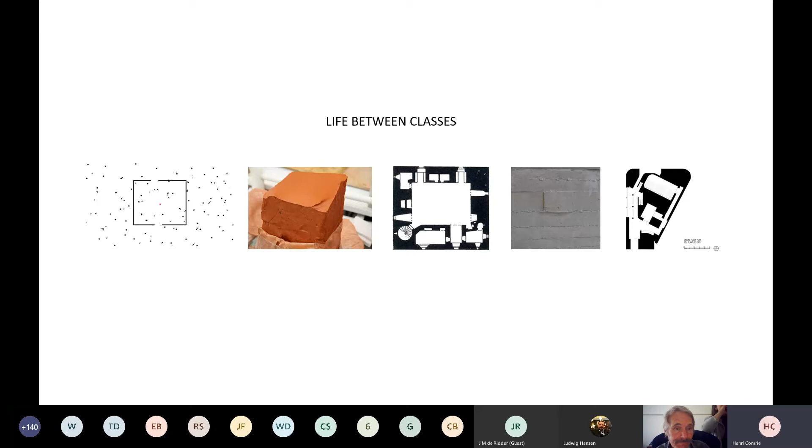Ludwig mentioned our practice being Cape Town based. For a very long time we've practiced around this environment, Long Street, one of those beautiful streets—if you move up and down it there are all these buildings. Ultimately, if you asked me to talk about any specific building, I probably wouldn't be able to. One always thinks of it as a whole, and I strongly believe that if you build better streets, you build better cities. If that's the priority, you get all the other benefits that come with building cities.

So the talk is very much related to architecture in context, and how our practice's architectural work has been influenced by an urban design focus and urban design awareness.

This is a series of drawings from the first stage entry for the Kimberley competition, for which Ludwig Hansen's practice did the framework. The images show something unlikely—building something very dense and compact in a very low density environment, in the Northern Cape, which is the least densely populated of all our nine provinces.

So the opportunity is really remarkable, starting from scratch in a place like Kimberley, thinking about the future and the opportunity to build a campus—how would you do it with sustainability principles in mind, with density being one of the key aspects?

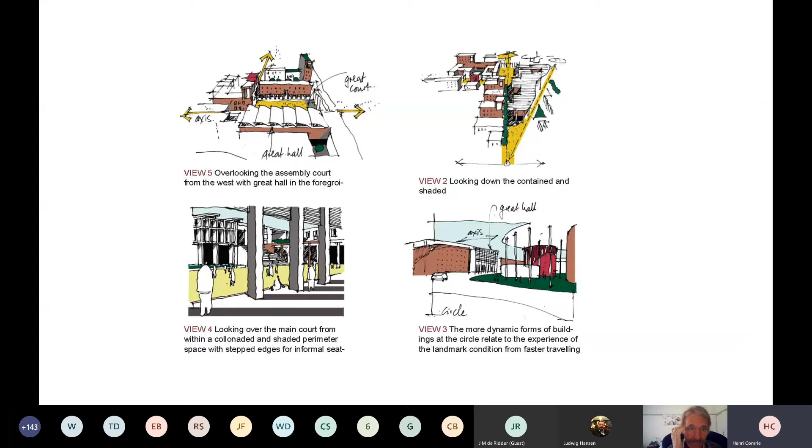If one imagines how almost all campuses in South Africa have been built in the past, they've been detached, removed, typically campuses rather than city universities.

This drawing is from the second stage of the competition. It shows how the framework presented to participants forced everybody to think about buildings in context. Without even knowing which buildings we would eventually do, we had to present a proposal demonstrating an attitude towards building in cities, or rather in Kimberley in this case.

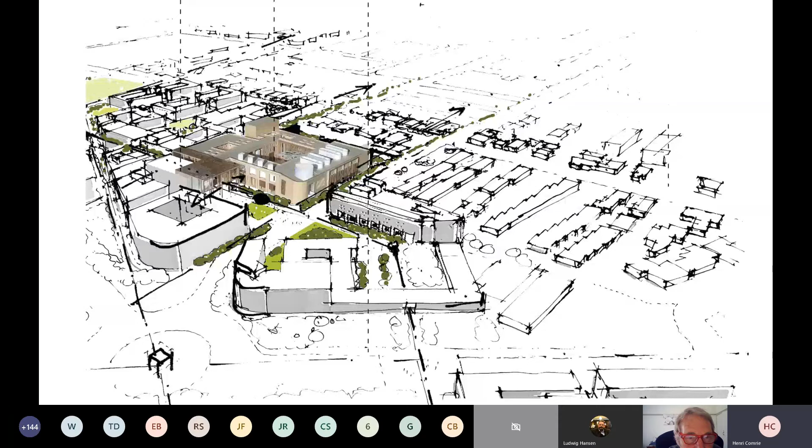So the model you see is not the building we eventually built. We built other buildings, but I'll get back to that.

Also in stage one, there was the opportunity to do research—to think about the Northern Cape, its climate, the vernacular, and absorb all these things differently than one usually would, where often from stage one you're under pressure to produce quantities, areas, parking ratios, policy conformance, approvals processes, and so on.

So the competition in that sense was fantastic, giving us space to think about this before we even knew we had the job. If one could apply that culture to all projects, that would obviously be fantastic, but we don't always have that benefit.

Some more drawings from, I think, the second stage competition entry. I'm talking about first stage and second stage—the first stage was an open stage where every architect registered in South Africa could participate, and the format was 10 A4 sheets, which is manageable. I literally did that on my kitchen table.

When we got to the second stage, it was down to 6 A1 sheets, if I remember correctly, which gave us opportunity to think more about the problem, but in the context of a specific building for which we were given a footprint.

After the results were known, we were dispersed onto different sites, meaning we didn't even build the building we designed in the second round—a very innovative way of running competitions, forcing people to think beyond their own buildings, to think about context and responsiveness.

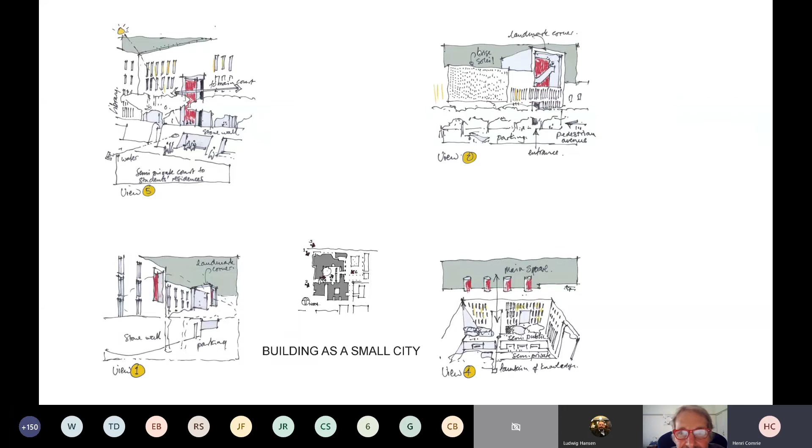With all universities, all campuses, the narrow definition of building a campus is to provide teaching facilities. We know at the moment all of you are sitting at home in different spaces, not even at university. The talk I'm giving really talks to that too.

What is there beyond the formal teaching facilities, which is always going to be the focus, the anchor? In the shopping mall, you'll have the Pick n Pay being the anchor. Here you have these classrooms, but they're also sources of energy and movement, and they're anchors in space. So they're much more, their potential is much more than their physical extent.

But I'm going to be zooming out. And so we'll be getting back to these, but I'm going to zoom out for a bit. This is really the challenge.

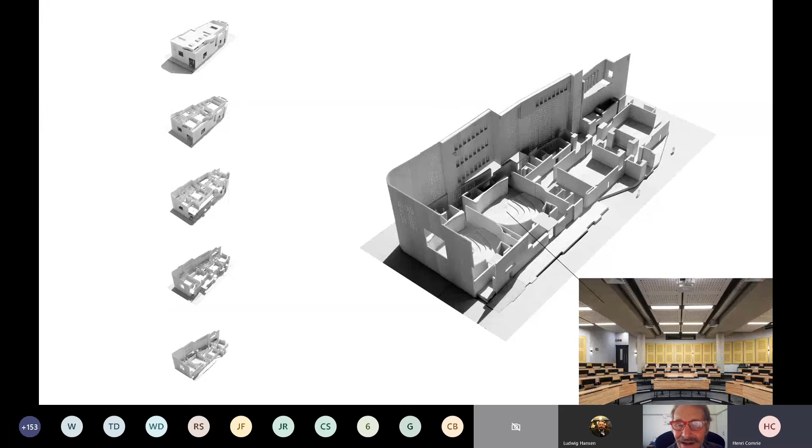But you can see how that massing has now been carved away and how we've stacked it. And this is a physical model. It's not a BIM or a computer model or whatever, because in a way, a building like this, which hasn't got a grid per se, it isn't there, but it doesn't start off with a grid.

Those sort of repetitive mechanisms don't work that well. And we take a lot of joy in doing bigger buildings where that doesn't become a fix, where BIM doesn't become the master. It's just a tool.

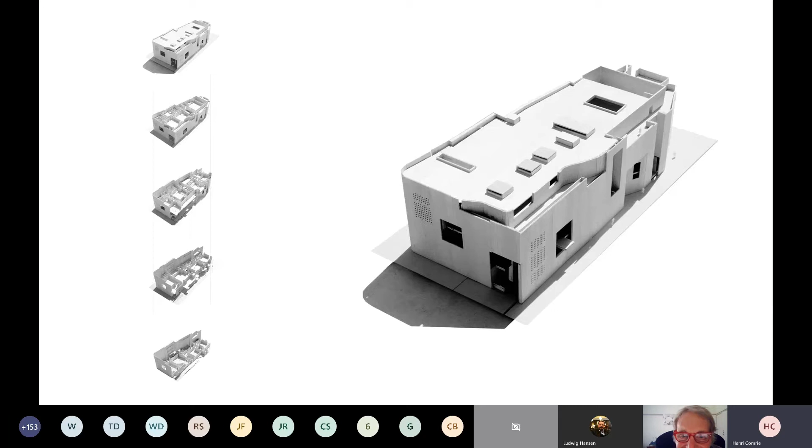So if you look at the stacking going up and then eventually get to the envelope, it's the way that we work. And we can't actually do without the physical model, because we constantly refer to it.

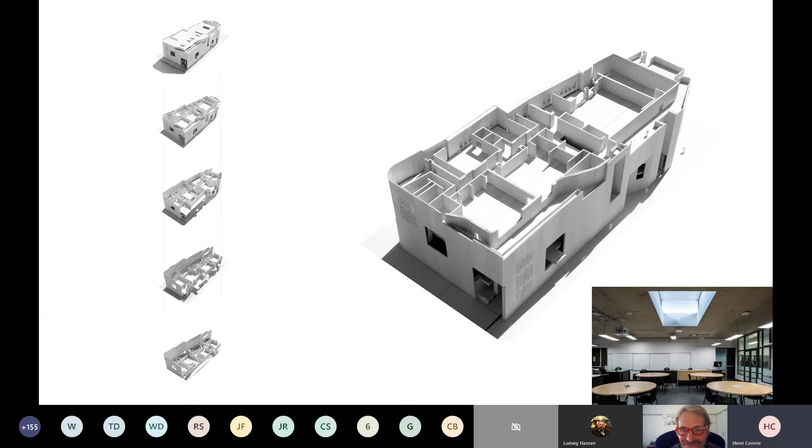It also is what Venturi would call the difficult whole. It's a complex arrangement, but when it's done, it almost should seem as if it was effortless. I think that is always the big challenge with architecture. Good architecture seems effortless, but we know behind that there's a lot of effort.

This is a different project we're working on, in the city area of Cape Town. It just shows again, in our own practice, from an urban design perspective, when we do housing or anything of that nature, density is the driver.

And then again, one can imagine this being a mass, like that clay block, and then you start carving away, and then you arrive at the buildings. You don't work the other way around. And as I said earlier, we enjoy working like that.

This is another framework that we're busy with. And in time, your view, or our view, of architecture and urban design becomes inseparable. I think that's one of the great things of getting involved in urban design.

There are all these terms, urbanism, placemaking, and so on. Ultimately, formal urban design, studying urban design, getting used to the principles, it becomes a staple. For us it's become a real joy, because a lot of those other things aren't closely related enough to architecture and building, they're just events.

Then one looks at this drawing, and I've consciously faded out, created a watermark of built form at the back. Ultimately it's about this. It's about maximizing choice for the greatest amount of users. It's a loaded term, but really it means standing back from the building and not talking about my building or even our buildings. It's a collective, because on a campus, of all environments, this is a profound opportunity.

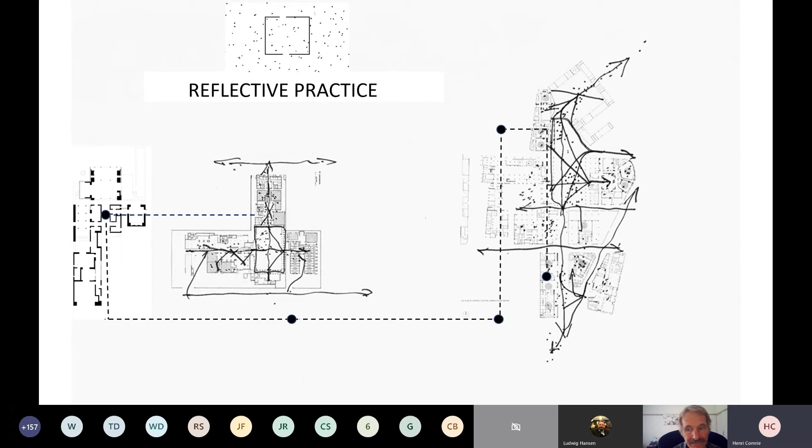We've moved along. If one looks at the plan of Rome, this fantastic drawing of 1748 by the Nolli map of Rome, it's a fantastic drawing. Initially I was intimidated, I remember as an architecture student, intimidated by this very busy, large drawing of Rome.

I've only really been to Rome recently - it's circumstantial. I've been to many other places, but Rome is one of those places where there's this fantastic balance between object and space, where one can enter objects like the Pantheon, but generally one's experience is this magic maze of spaces which is not dominated by the car.

If one looks at this drawing - let me get my laser pointer, which remarkably I found - the spaces that flow into buildings is really what interests me as an architect, meaning that one doesn't only have public and private. You've got these two magic layers, semi-public and semi-private, which is really what Rome is about.

And I think that's the sad reality of our cities, that things are gated, they're closed off, you drive into basements of office buildings. And even if people call these buildings mixed-use, they're not really mixed-use unless you've got horizontal and vertical mixed use.

Again, on campus you've got that opportunity. Pockets are these spaces off the avenues, the movement axes, the way people move - these delightful spaces, these pockets that sit off it, that you discover in time. The first time you go to a city like Rome, you won't even notice some of them. In time, you find them.

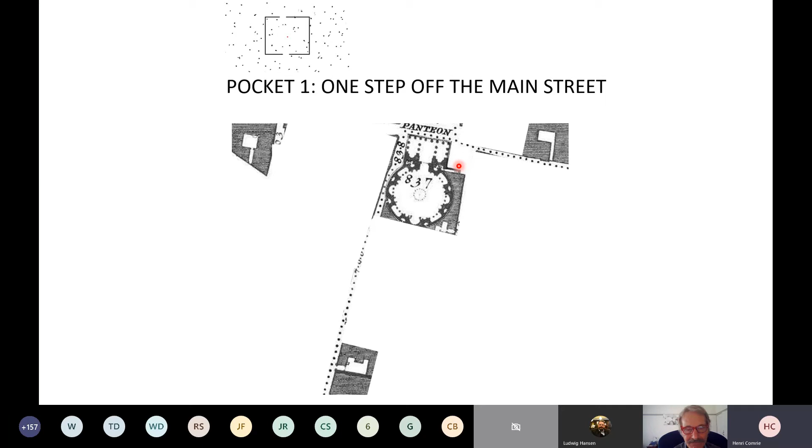Those are the sorts of spaces that are lacking - the positive spaces that are one step off the high street. If one looks at a design like this, it's those sorts of spaces, and those are really the memorable spaces. That's got nothing to do with the building itself - it's actually got to do with the good neighborliness of buildings, how buildings relate to those spaces.

Then there's the second pocket, which is at a finer grain scale, at the scale of the building. As I said earlier, one starts talking about buildings as if they are cities. This remarkable picture on the left bottom was taken by Gabriel Fagan, who recently passed away, from his airplane. I've been reading a lot, reflecting on Gabriel's life recently, and his fantastic work over a very long period of time.

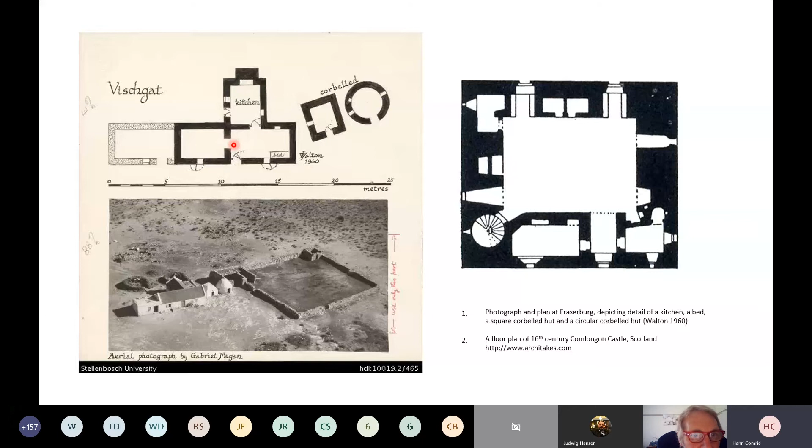I think in our climate we've got the opportunity to thicken walls, yet we've got these flimsy buildings - I call them SketchUp buildings all over now. Everything just gets stuck onto very light frames, rather than indulging the opportunity of carving away. As you can see on the left here, this is also part of the vernacular of the Northern Cape, and we'll get back to that.

This is just a bit of a detour into a pocket in a house. There's a door to a house, and the door is closed, but there's an anticipation and expectation of something that follows. Then the door opens, and there's another layer, and one sees into it, and you get certain glimpses of what lies beyond.

Light at the end - it's also a way one would look at a city moving down a street, and there's a square at the end, and you start getting that sort of sense of excitement. You want to get to that square, but as the next door opens, light catches your eye, and you can see a different order.

Initially you were just aware of the main order running down the house, the central axis. You become aware of another order, the lateral order, and those are often the more interesting spaces for me. The talk really is about the importance of not the full frontal stuff, not the main elements, but the serendipity - those sorts of opportunities for discovery.

And then if you look a bit further, you see a step on the right-hand side, the sort of anticipation created by that step. Then you turn right, you look into that space, and there's the stair, and light starts playing a role. You can see the rail leading you to the next space, and then the next space.

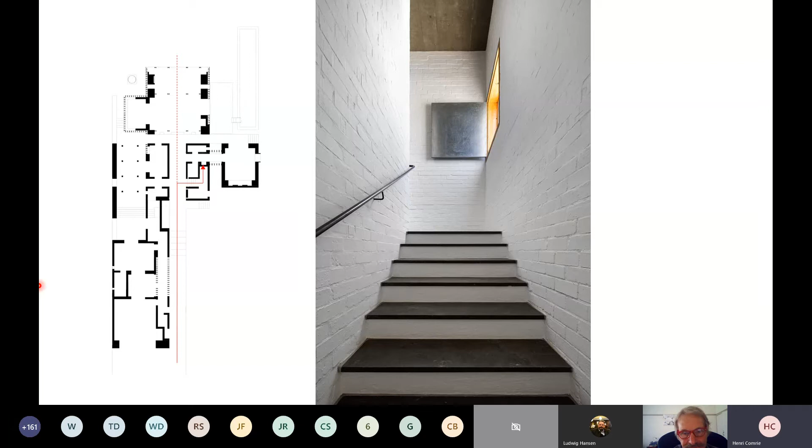I always say with thesis students, when selecting sites and projects, students tend to want to do something spectacular. If you listen to podcasts of David Chipperfield, I really love listening to him, he says we shouldn't be blown away by architecture, we should be fond of architecture. That's the spirit in which we try to do architecture. It's not about blowing anybody away, but creating a timeless experience that will be there forever.

Okay, if one looks at a house, this is a different house that we did, not the previous one, and this one is fairly well published in the Cape Winelands. But if you look on the inside of a house like that, this is really what we're pursuing, it's those pockets, the delight of the use of light, and the principles that Louis Kahn spoke about, that once you take the light away, these spaces aren't the same as they would otherwise be. There's the fantastic opportunity to use light as something dynamic, patterns that move, morning experience being different to evening or late afternoon experience, but also the opportunity to frame views out. So you're sitting on the inside looking out, not on the outside looking in and admiring the architect's work as an object. And as I said earlier, that's very much an urban designer's way of looking at things.

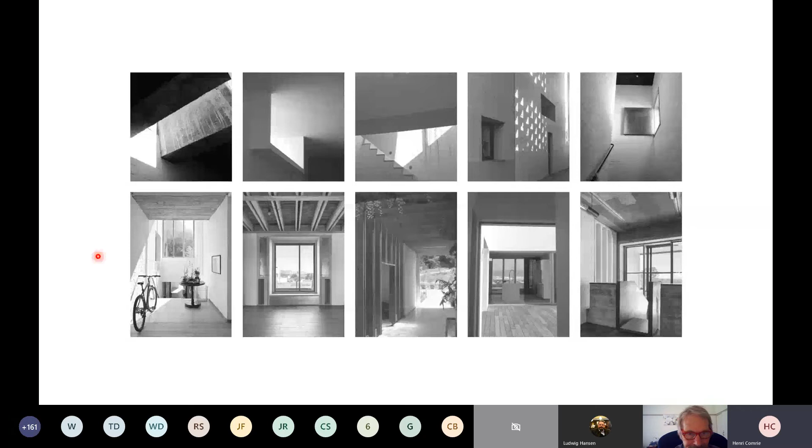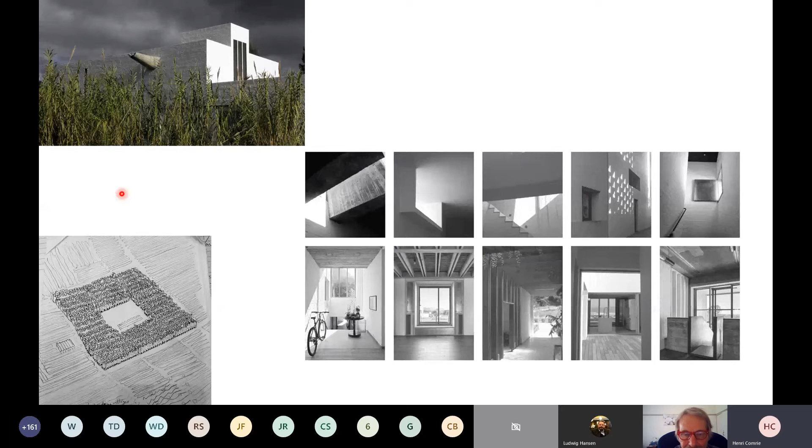It takes a long time to develop this sort of work and to feel comfortable with it, because you always have to find ways of convincing your client, because it's very difficult. How would I sell this typically to a client? They say, are you crazy? You're going to sell me a big white box? Because that's all I can see on the drawing. In your mind, you've got spaces like this. And it takes time to do what Adolf Loos calls the Raumplan, or the space plan design. Carving and sculpting space takes a lot of time and effort.

Then comes refinement and essence. I spoke about Gabriel Fagan a bit earlier. If one looks at these two houses, the architects were the same age. On the right-hand side you've got Gabriel Fagan, 1951, at 25 years old, a house for his parents. On the left there's a house by Richard Rogers, who's recently retired from his practice, I think he's 87. Gabriel passed away at 95, this house is from 1970.

And if you look at these drawings or pictures of these houses today, they're absolutely timeless. Those are examples, or inspirations, of architects that for their entire careers pursued their passion and a very specific way of looking at things. We're living in an era of Instagram, of social media, of information overload, where it's very easy to become confused. So I've got great admiration for architects that have been practicing. In Gabriel's case this is 70 years ago, and this house is still a good house, it still does all the things it does.

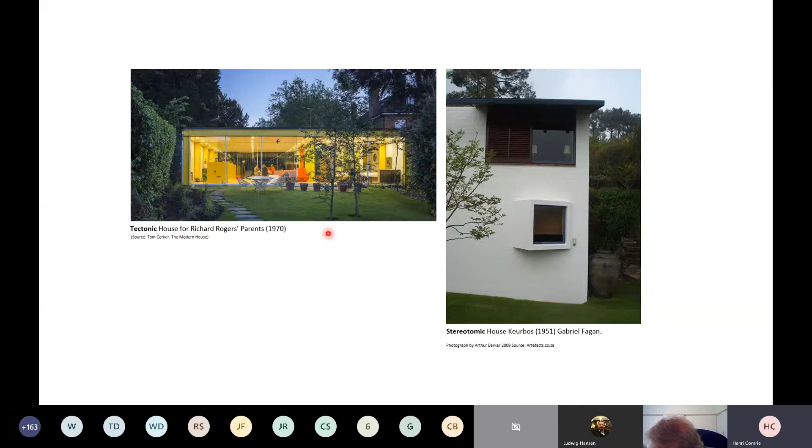If you look at Rogers, he's taken that through scales to the Pompidou Center, but it's still Rogers, and you can still recognize that. And then also the love for detail, because if you're always busy changing form externally, meaning it's a circle or a star or whatever you want to call it, the coolness on the outside, you actually rob yourself of the benefit of getting to a level of refinement. It's just beautiful, simple details, not look-at-me, best sort of detail everything. It's just the passion, integral to this image, and the simplicity of things.

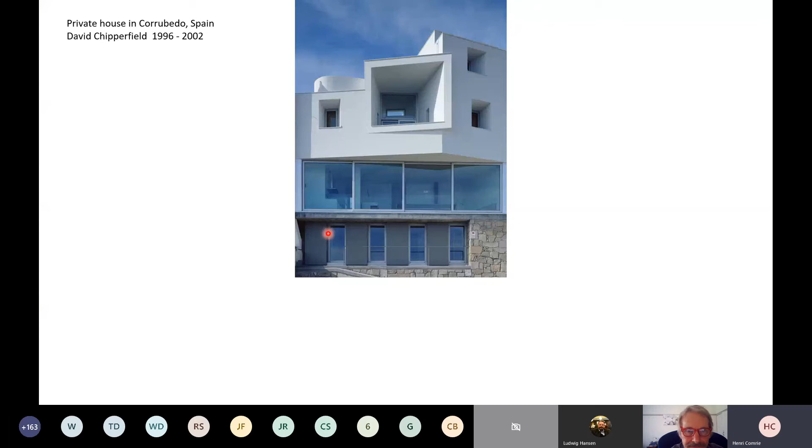The joy of constraint, I spoke about Chipperfield earlier. These are drawings by Chipperfield, just a quick case study. If one has to design a house in that context, what would you do? You can see quite severe constraints, and I suppose in this context, I don't know all the detail, protocols, regulations, codes, heritage, whatever. How would you respond in a context like this? So it's really about how you become a good neighbor in that context. This is the house, but really you can't actually imagine this house without its context.

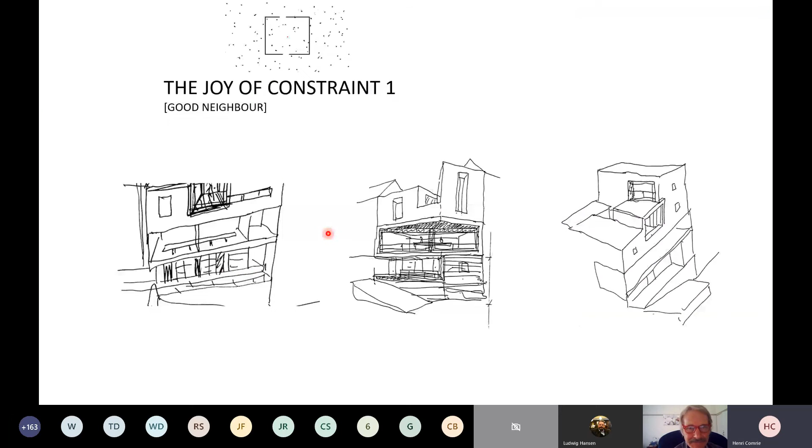If you look at that broadening of the view of that house, you can see how beautifully Chipperfield responded to the immediate context. Again, if you don't confine your effort, you will never get to this. If it's all about the instant flash, you will never get to this. You saw the drawings earlier of Chipperfield redrawing and redrawing this connection between the house and its neighbors, until it just made perfect sense. It's one of my favorite projects. If you look at the back, it's even more profound. See how the lines have been taken up - that's really what urban design is about, responding, not imposing. So this is a small piece of urban design. It's no coincidence that Chipperfield's urban work, much bigger projects, are equally successful.

So, next point, Raumplan. This is the Adolf Loos approach to design. As I said earlier, that's the defining thing of a Raumplan building - if you move a section a millimeter, it's a different section. If you think about Glenn Murcutt's work, for instance, you develop a section, you extrude it, and that becomes the building. This is a very different way of working, and it has its own merits. I suppose they're both equally difficult, but I enjoy, and our practice enjoys, that.

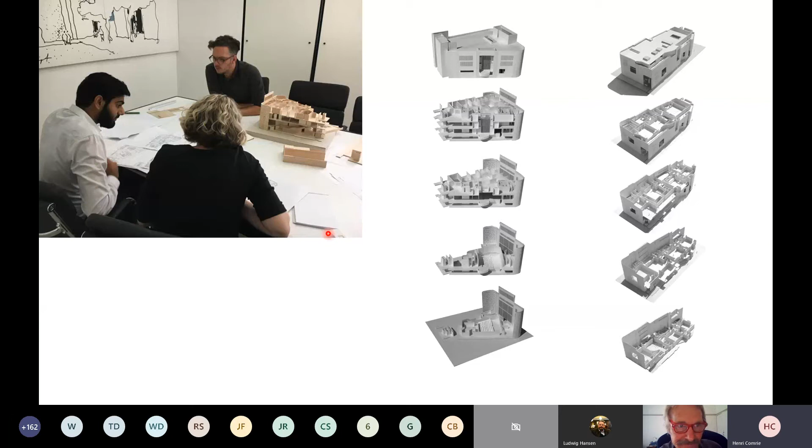Again, you can see in our work, that's exactly what we do. We think about the promenade, but to see the promenade, you must actually think and draw and model and get to grips with it. Then the purpose of frameworks.

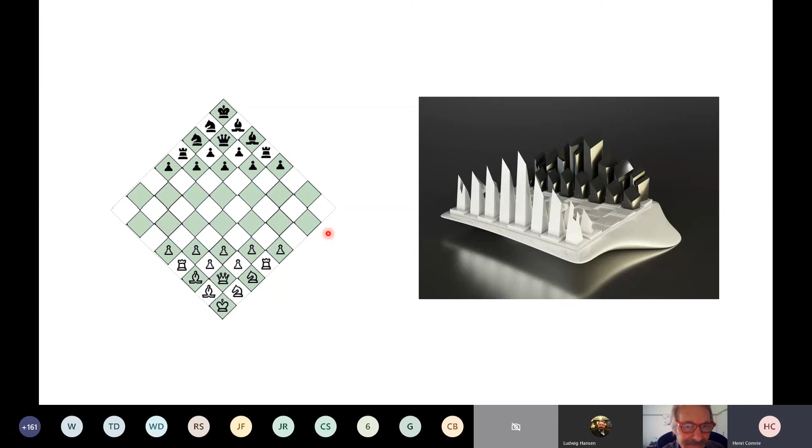On the left, it doesn't make any sense changing that grid into something illogical in terms of what the game wants, and that's planning. Often planning becomes convoluted, all the paraphernalia, that's all the baggage around planning, which will never create the places that we enjoy and love. Again, the essence is something I think one has to get back to. We've got no interest in doing the buildings on the right - we've never had - but yet that becomes the default in large parts of the city, and unfortunately that's the aspiration of many architects.

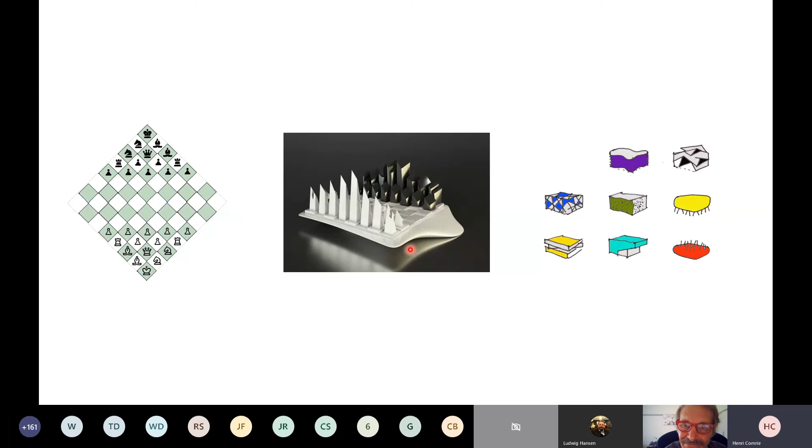I think through urban design, one wants to step away from that and just work through them, go through the motions and the everyday stuff. An urban grid, a very simple urban grid like that - why mess with it? All of New York is built like that, and if you take one piece away, it creates all sorts of opportunities that the grid itself generates. Without the grid, you can't have the void. So these things go hand in hand.

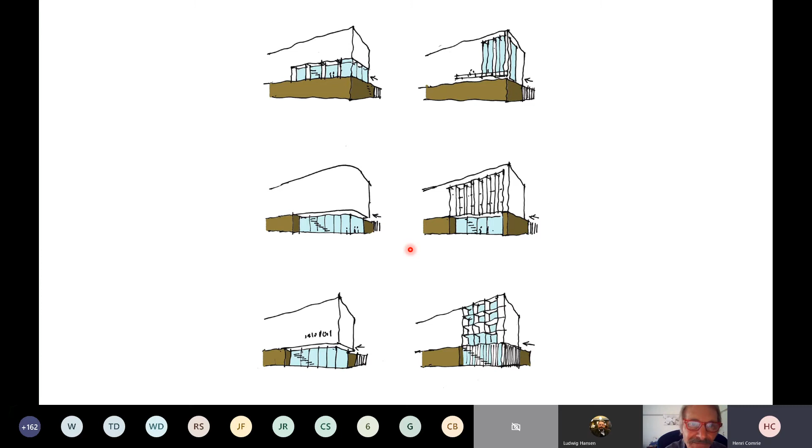If one looks at a simple perimeter block building, within that frame, that mass, that block of clay, this becomes possible. There are endless opportunities to discover and design within it without changing the form - just stick to the form that fits into the city. This is another exercise for an urban corner. If you've got an urban corner, the way you deal with it doesn't kill architecture - there's a lot of joy in architecture, in crafting at that scale. So we've spoken about the pocket, a sort of sub-space, and now the corner, which is a sub-element, and those are really the typological components that we enjoy working on.

Back to - we're going to run out of time. If I run out of time, I'll just skip through some of the slides, but we've got too many.

Henri, there is time. Just relax, there is time. Okay, so I'll pace myself back.

And what Ludwig did is he said, well, it's all about the spaces between buildings. And without really understanding himself what will go into these buildings, this became the dominant order. We've, through many years of working in urban design, realized that if you fix it and you've got a program, you will get it to fit somehow. You just work backwards from that form, and if it doesn't fit, it's more important to keep that envelope than to start pushing out and ruining the spaces in between.

Because really, if I work in the city center of Cape Town and somebody said, well, we've demolished the building here, you can build a new building - that's the fix. You are actually stuck with that space, and that's how cities have been designed forever. But somehow in this country and other new world countries, we think that's not really about the space, it's about what the building wants to be. So you're always looking for this open site, this place where you can exert that freedom.

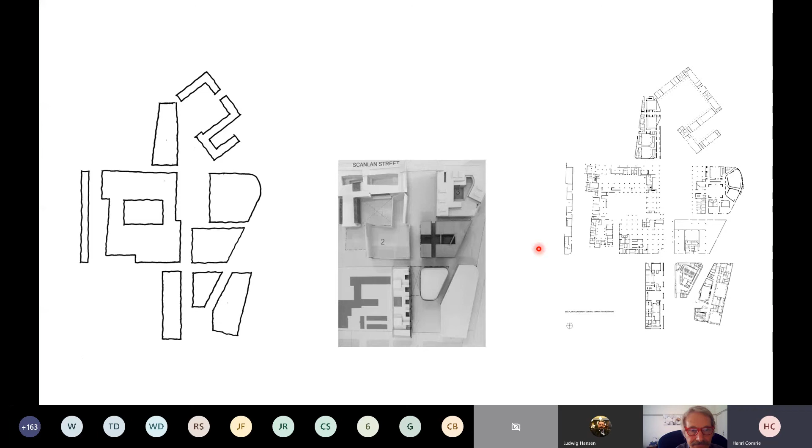Whereas that was never our intention. We always said, well, how can you demonstrate if that is your fix? How do you work within it? And while I'm on that topic, I think with university projects, there should be a framework given to students, and they should be tested on their ability to work within frameworks. Not for all students to every time redo the frameworks, because in practice, that's one of the big problems we've got - you do frameworks, and then the first thing is the architects start questioning the framework. They must demonstrate how they conform. Their skill doesn't lie in questioning the framework, because that's what cities are about.

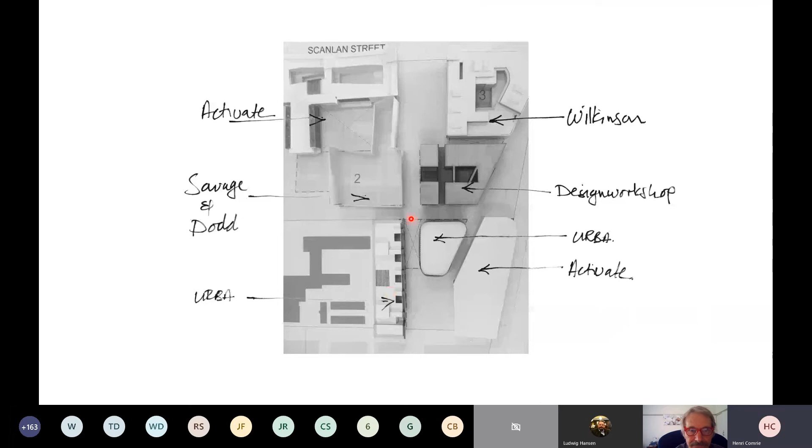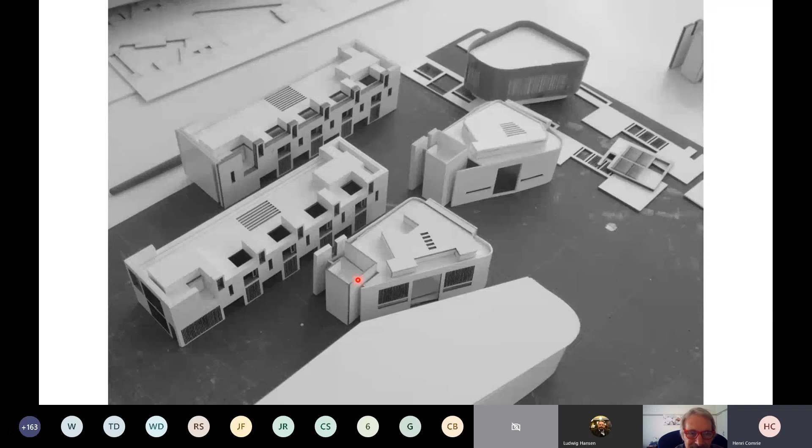So the buildings are a backdrop to student life on the GIBS campus, and it's been designed in different styles. The first style was more postmodern, with some postmodern tricks in it. The latter phases are much more modernist, or primitive modern, as I'd like to call it - simple in its expression.

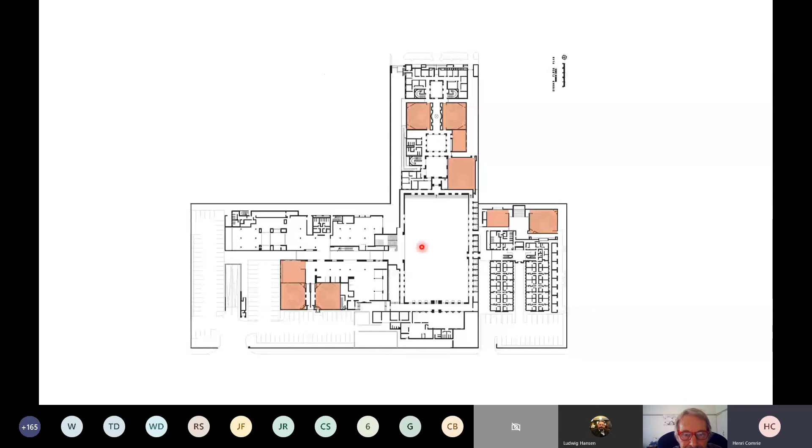If you look at Kimberley, same thing - you've got these, and they're not absolutely accurate, but you can see the formal lecturing facilities dispersed throughout the campus. And this forces students to move through - not forces, probably the wrong word - it's just the fact that these things are dispersed gives much more potency to the in-between. And again, these are all positive spaces related to these formal environments.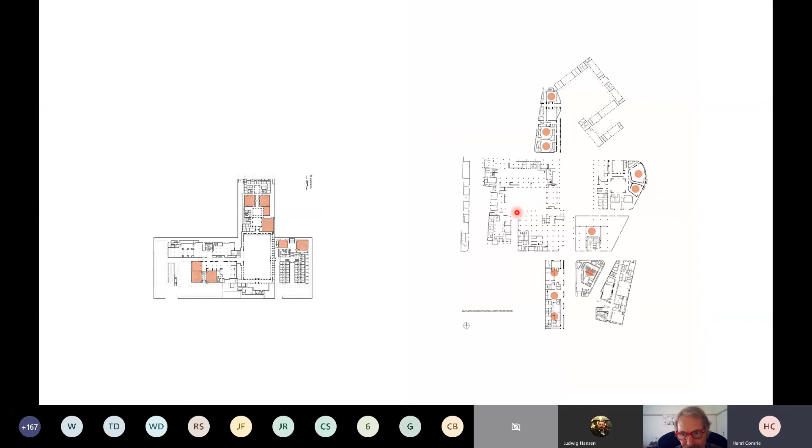And now with COVID, these spaces are much more important than they were before, because really they are the breathing spaces, the spaces of choice. So I've spoken about those and the messiness and the layers over them, which is really what it's about, which is the real legacy.

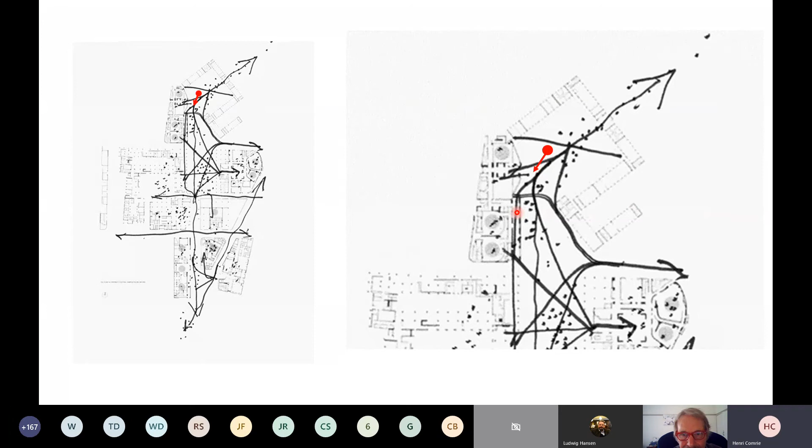Then choice and action. If one looks at those images - I went, actually it's a photographer, went to Dave Southwood, went to the site on a Saturday morning. Unfortunately, not a lot of people there. But it's on the Kimberley campus in front of a building that we designed, which is that building highlighted in red. And you can see the arrow where the camera was set up for 35 minutes.

I have to turn the building on its head really to understand what this is about. The building was designed in response to a movement axis that comes from town and then diverts. This is almost like a pinball machine - it's almost like a pinball flipper. It flips you and you move down there. So the building speaks and receives you and also guides you on the route to the remainder of the campus.

So turning it on its back, really, it's a method used in the 70s and 80s. James Stirling used this quite often - the worm's eye view. They're very difficult to read, but you can see the figure ground drawing superimposed and that massing sitting within it, and you can see our Raumplan type building, which is mass driven, and the block of clay that we carved into.

There's the movement system that goes through the building. It's possible to actually move through the building, or you can move in front of it.

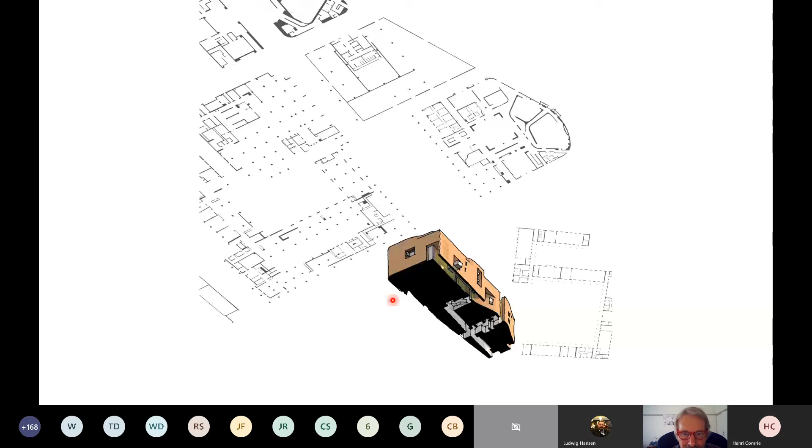Okay, so this is, I'll just see if this works. If it doesn't work, I'll just move on to the next one. I don't think this is going to work. I've made some freeze frames. Oh, there we go.

Within that sequence of 35 minutes, at 7 minutes there are people walking in front of the building, then nobody there. Then more people appear, somebody enters the building, there's a guy on a bicycle. On the previous slide you can see somebody peering over the balcony. That's really what, for me, a campus building should be about - this interaction with the building, moving through it, moving past it.

This is an east-facing facade, so in the morning it's a very popular space. On a cold winter's morning, students sit there with their backs against the wall, with the sun on their faces. Then in the afternoon, in this very hot climate on a summer's day, it's in shade.

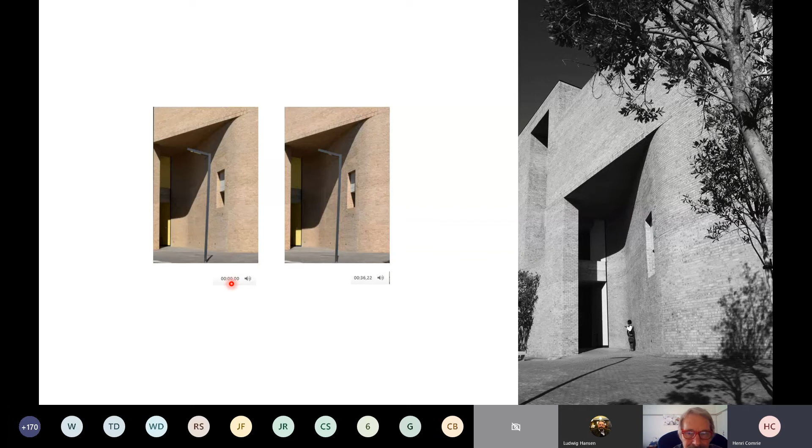So it's equally popular, and those trees at some point will become mature and it'll be an even nicer space. What you probably didn't see was how the shadow moves - within a space of 36 minutes that shadow moves, and there's an ability to animate the building in this fantastic climate we've got, and the opportunity of the Northern Cape's crisp light to work with that as well.

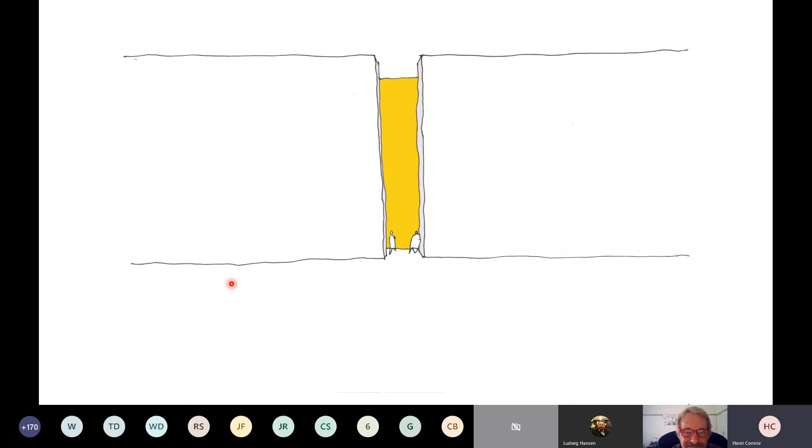In terms of relative space and thresholds - just the animation I did, you've seen that image before of somebody entering a space. What does it mean? This is a private space generally, but if you change the scale it becomes public - it says I'm public. At building 8 in Kimberley, that's the scale of the entrance. That's a different view. This is building 5, the other smaller footprint we did, the same thing.

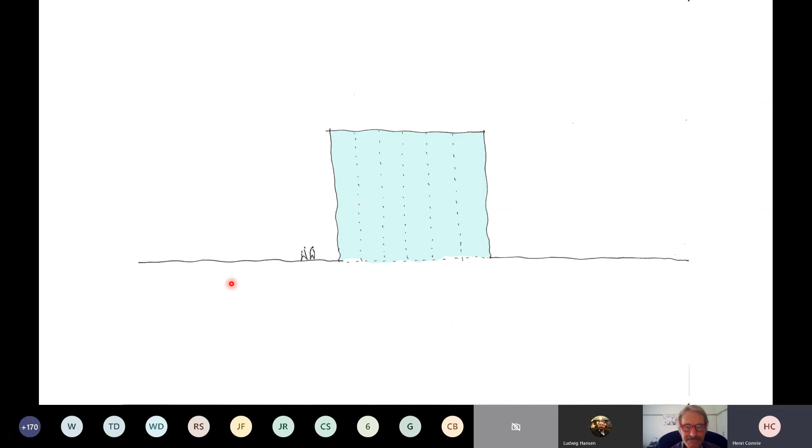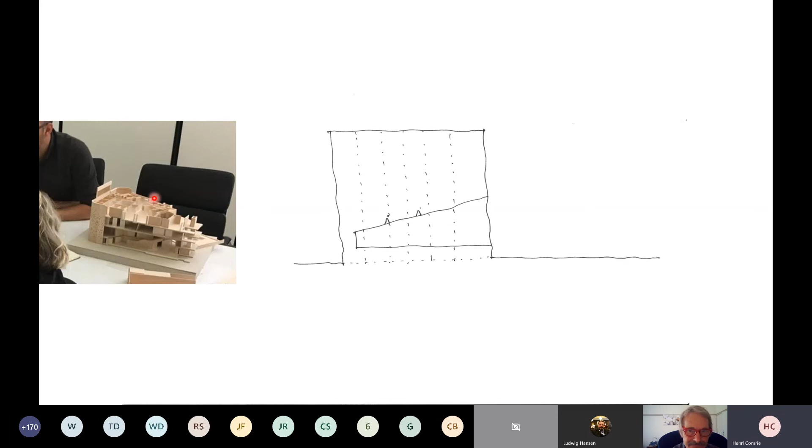So there's an ability to work with relative scale in these spaces. A typical shop window - it could be in a city, on a street. A commercial building would have floor plates in it. The opportunity with a campus building is that you're dealing with this idea of a promenade, of students entering that space, moving into those spaces. You can see that similarity between what you see on the model there and that there.

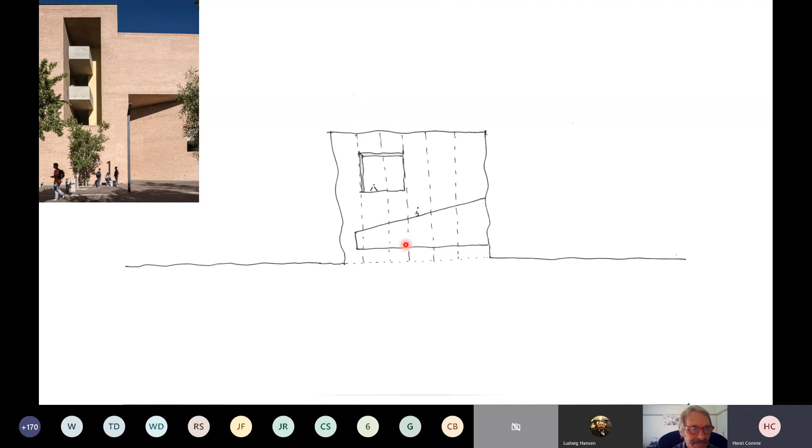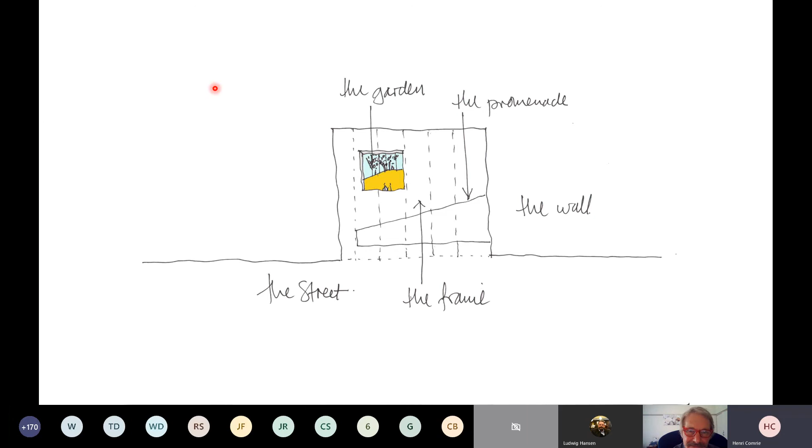Then there's another layer appearing, and there's the suspense that one works with - you can see that layer represented on the image on the left. Another layer appears, and then there's a landscape beyond. It's this movement through space, the promenade going from public through semi-public, through semi-private, and sometimes to private on a campus, but it's not really about that. Those opportunities are the layers we like to explore in our architecture at all scales, whether urban or residential.

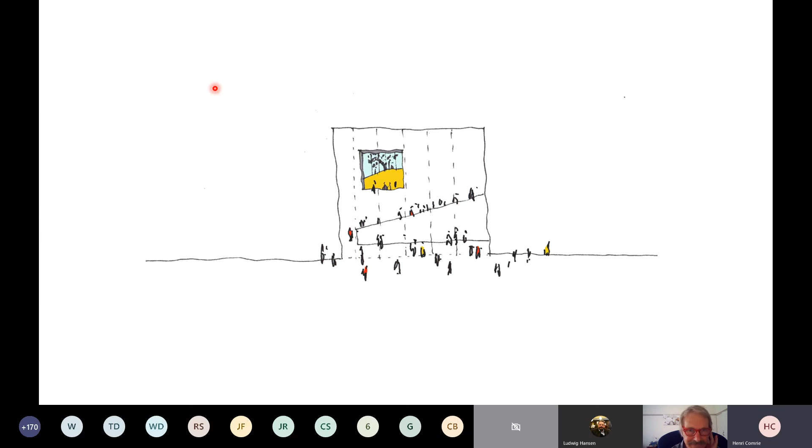And then the people come into play - ultimately we design for those people, moving into those spaces and enjoying them, and the chance encounters, as Christopher Alexander calls it, 'a city is not a tree.' Then the landscape layer with it. So the frame is very simple, but the level of experience is very complex. If you complicate the origins, you overcomplicate things and make them too cumbersome. So we believe one has to make these things very simple and legible, and then you put these layers on, and that's where things really happen and come to life.

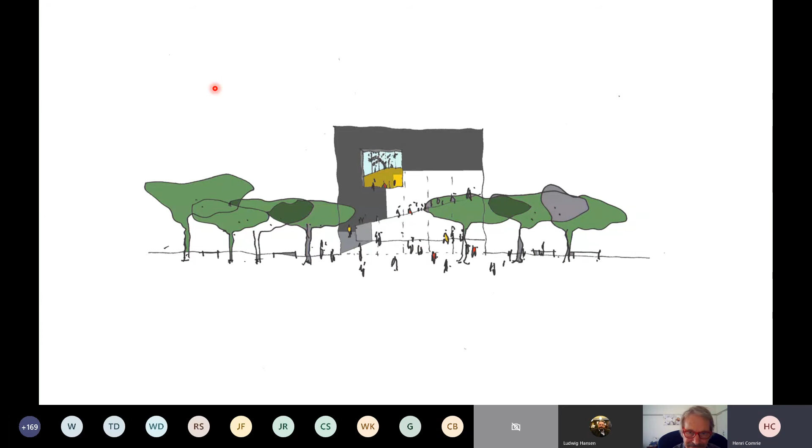Then you add the light, which is something always important in our work. Once one's worked in Europe, you realize what a gift it is for us in Africa to work with light, the abundance of light. And then there's the proportion and scale - I referred to Gawie Fagan's work earlier, this love for proportion and crafting things so that they're just the right size is the other layer.

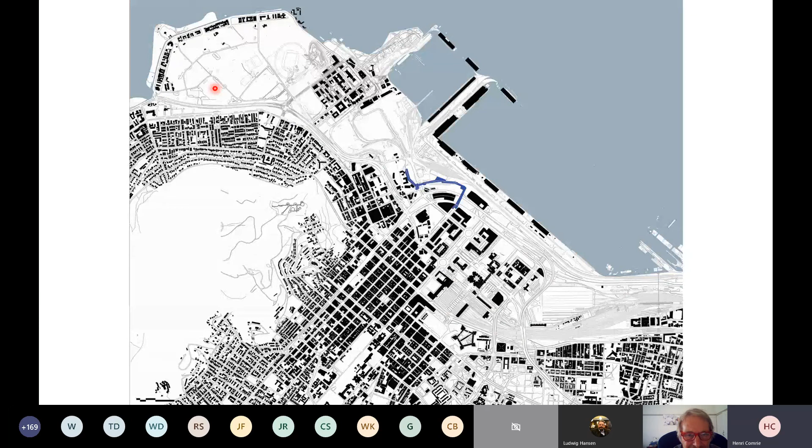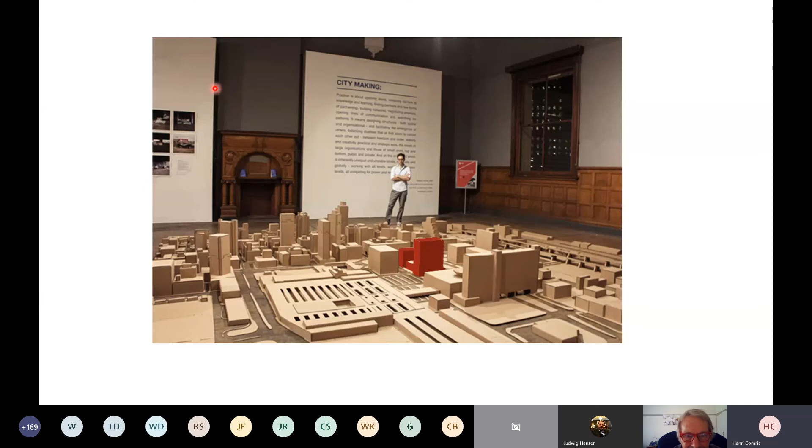Just a quick case study - we got a call one day saying urban design work was required on a building in Cape Town. It ended up being that building, and there was a concern about a piece of land in front of the building - it's the footprint you see there, the red building. Not a very nice building, but it was due to be redeveloped, and the city owned a piece of land in front of the building between those two big blocks.

And they said, well, if this building gets redeveloped and wants more parking, then we need to engage in a trade-off, and something needs to be given back to the city. So this is the space that we found - it's quite a nasty space.

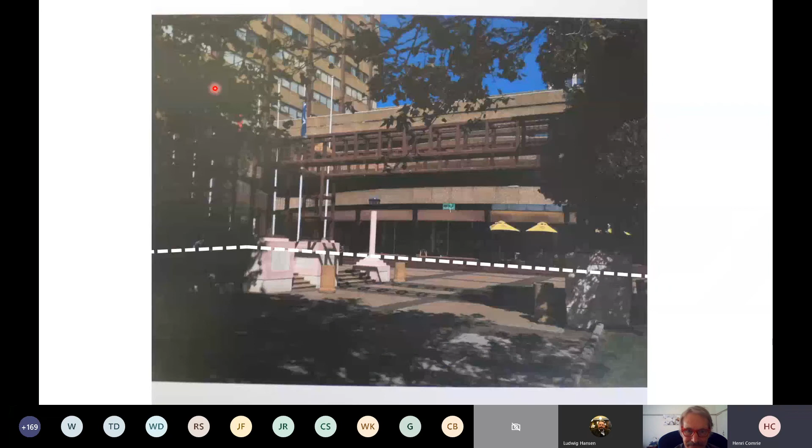So this is what the space looks like today, and that's what it looked like before. And this is urban design's influence. Without the urban design influence, this would not have happened, because all the building money would have just been spent on the building itself, on its envelope, not on this.

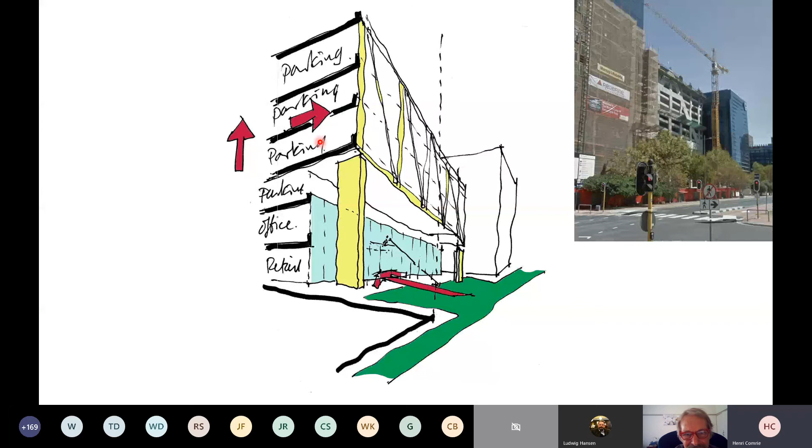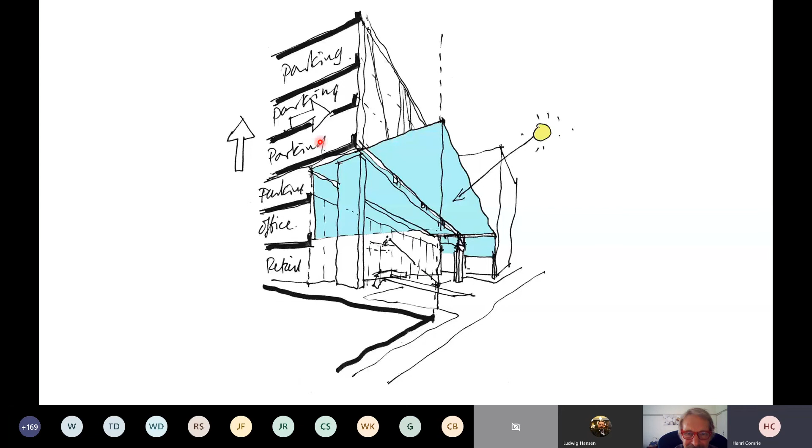Deepening on the relative scale, so you can see that space indenting. Then we said if you want to put parking on top here, use air rights, but you carve back and you have to create 2 columns and a big truss, and you can see that happening. Through the urban design department of the city's insistence, we developed this charrette process over 8 weeks, and then Burgertman did the detailed design, and Studio One did the landscaping. And so we said, no, you need a canopy of scale at the scale of the city over that space, which was calculated in terms of the sun angles. And then one zooms in further, and you get this quality of space.

In the foreshore, which is not a very nice environment, people think Cape Town is magic. That's a very bad part of Cape Town. It's just disjointed buildings floating in space, modernist sort of infrastructure.

Okay, so done. This is, I spoke about confining things, setting limits for yourself, not absorbing everything, not accepting everything, not being influenced by everything. The word influencer for me is a problem. If you asked Gawie Fagan if he thought he was an influencer, he would say no. If you asked Richard Rogers, he would say no. They become influencers through their work by default, not by demanding that tag or bringing that tag to their own CV.

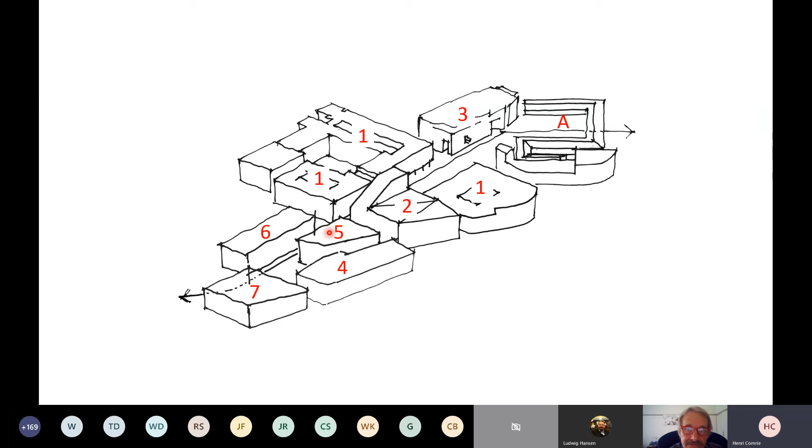This building, building 5, I'll just quickly take you through a tour. As I said earlier, one actually has to visit buildings to appreciate them, and that applies to all buildings. So these are 2 buildings that we designed. You've seen the top one. The bottom one is the smaller of the 2, and we waited longest for the design of that, or building of it, but it was actually designed first.

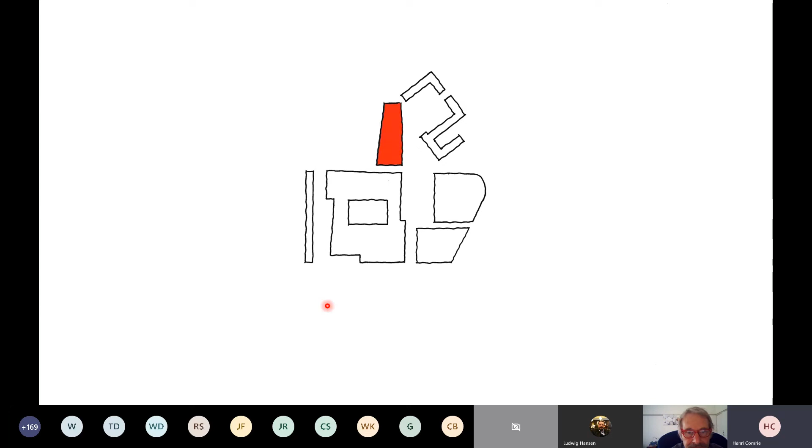So in the sequence of building in Kimberley within the framework, that's a historic building, William Pescod building. Then the second series of buildings were built there. Then we designed our first building there. Then another building was built there. We then built that building there. And Mphethi Morojele is building that building there, his practice. So he may have spoken about that building in his lecture.

But what it says is, at the time that you design this building, you partially respond to a surrogate context, which is the framework, and you partially respond to a real context. And for us, it was interesting because our work straddled those, because we didn't do the first building. So we could respond to buildings already built, and we could respond to the framework.

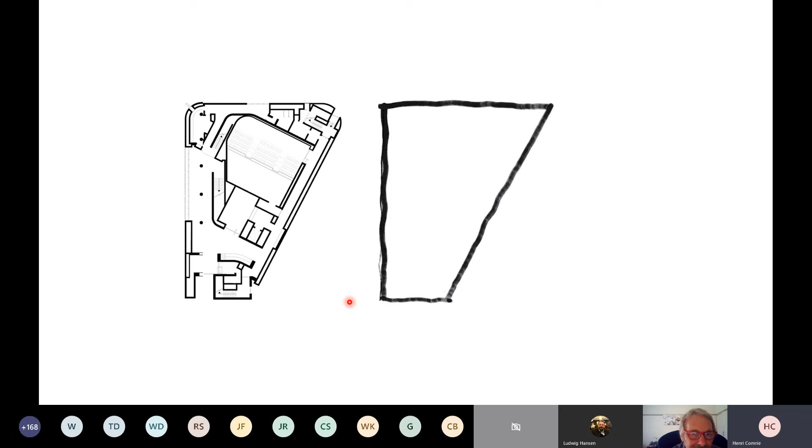So this is the shape of the small triangular building. This is the detailed plan, taking the walls that was done with a lot of effort in the office by my partner Amali Comrie and Etienne Brits over a long time, and several others. And you see what I've done here is I'm referring to the Louis Kahn influence of the thickened wall, those pockets. And if you look at served and servant spaces, this is what the plan ends up looking like. So you've got all those functional areas that are excluded, and then you've got this space, which is actually an extension of the public domain.

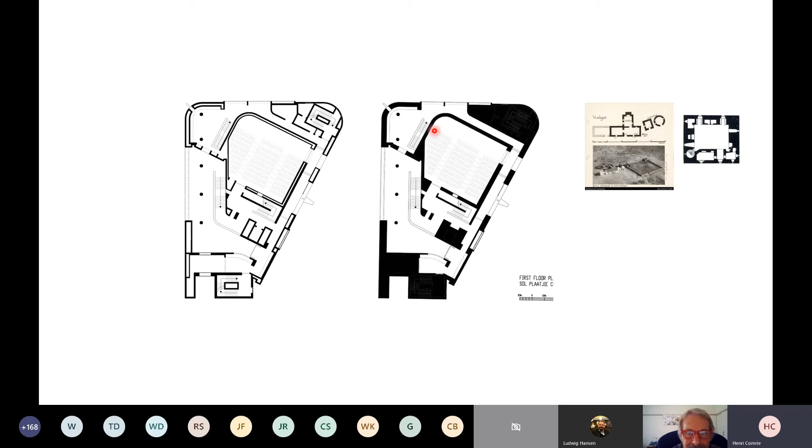So this is the semi-public space, and then you enter into these spaces. But the building, there's a fluidity between inside and outside in the design of the building.

Testing its massing in space. And then again, as I said earlier, the tension or the opportunity that lies between the public domain and the formal lecture theatres, all those layers in between are really for us what it's about. And you can see the campus coming together here. It's really exciting, and it'll only get better with time as the landscape settles.

So this little building here, triangular building, is not a very big building, 2,500 square meters usable space. It sits lodged between other buildings, and as I said earlier, these buildings were built by the time we built that one there. So you can see the composition and the containment of space, which the framework makes possible, and these buildings just displaying good manners and ultimately trying to create a very nice avenue for as a legacy, really, which is really the exciting part here.

Kahn, Ahmedabad. That sort of space and time and things are mature, and the rawness of the bricks and the material is part of the success, I believe, of the Kimberley campus.

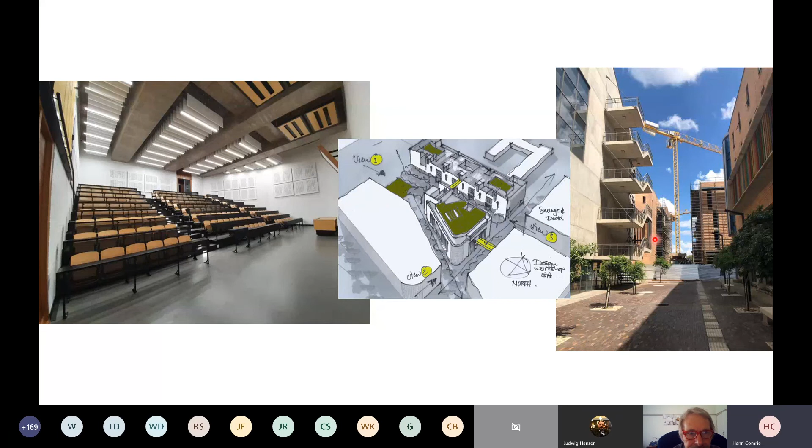If you look at the materiality, it's not overly fussy. It's also affordable, and why not?

If one looks at the way one enters this building, there are different ways of entering, but the formal entrance is off a park that faces south, or the building faces onto a park, and this is the south-facing elevation. It's about the exploration, then the materiality, the rawness of the material. This is a particularly nice picture because of the angle of the sun, just bringing out the texture of the brick. But you can see the reference to the solidity of the vernaculars in the Northern Cape. It's something that was taken on board from the outset, that you work with that, so that the building looks like it's in the Northern Cape. It doesn't look like it's in KZN or in Gauteng.

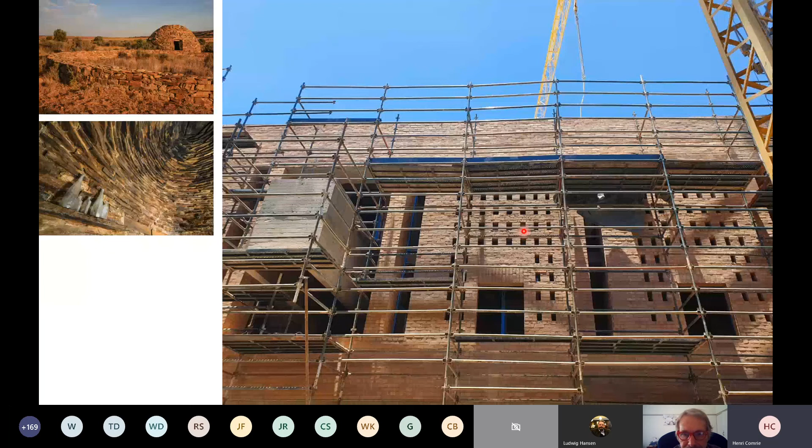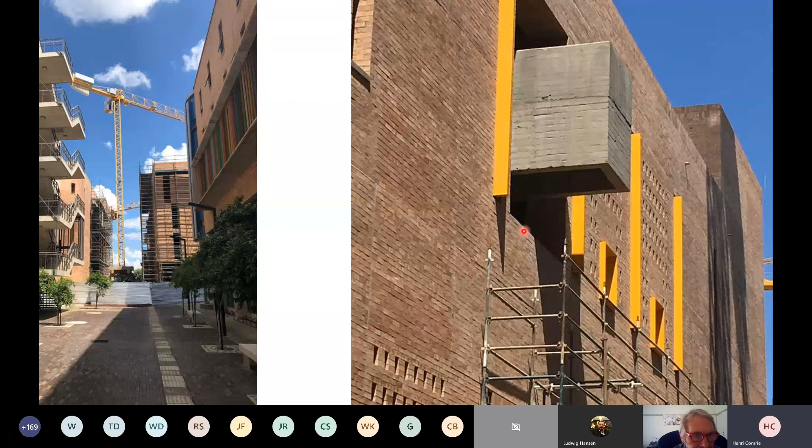Some more of the detail. I just need to thank Chris Billett for all these pictures. We haven't had professional pictures taken yet because of COVID. We haven't been back there really since the building's been completed, so we had to make do with these pictures from Chris, but they're really great. Thanks, Chris, if you logged in.

You can see the outside of this building, which is this mass which we carved back into, and really this thing coming to life, which lived in a model for a very long time in the office.

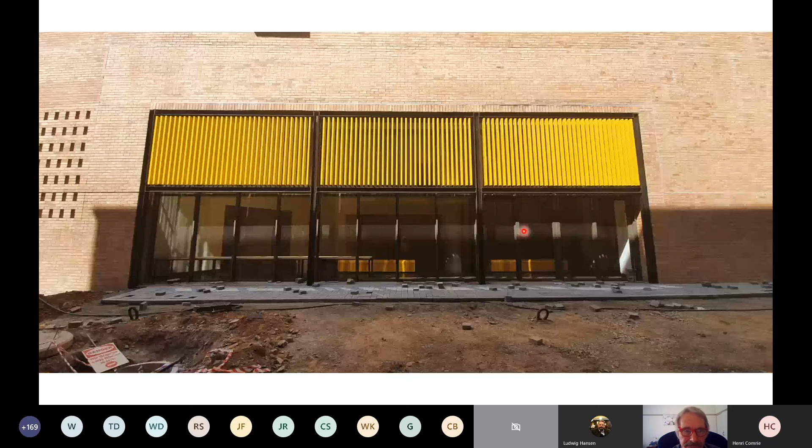As I said earlier, the building should actually be visited to be experienced, but this tension between permeability and solidity is something that we worked with. And then I spoke about the pockets earlier, this carving away.

So if one enters the building through that big slot, and I spoke about the scale earlier, it gets pinched, and this is the first view you get. No students in the building, as you can see, because of COVID, unfortunately. I'd love to have pictures of the whole building filled with life.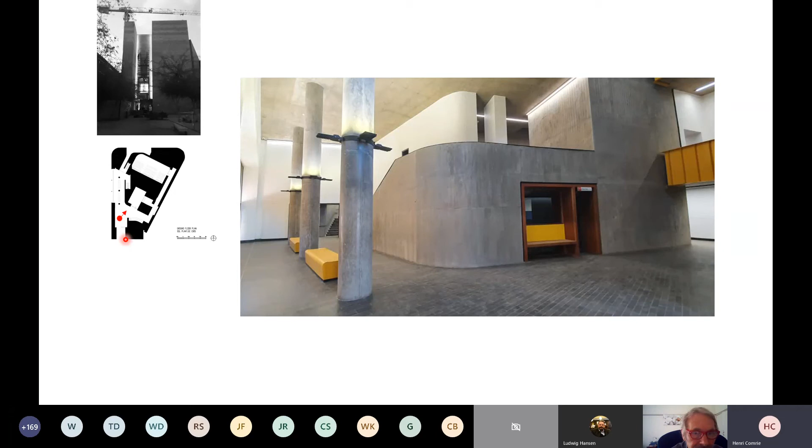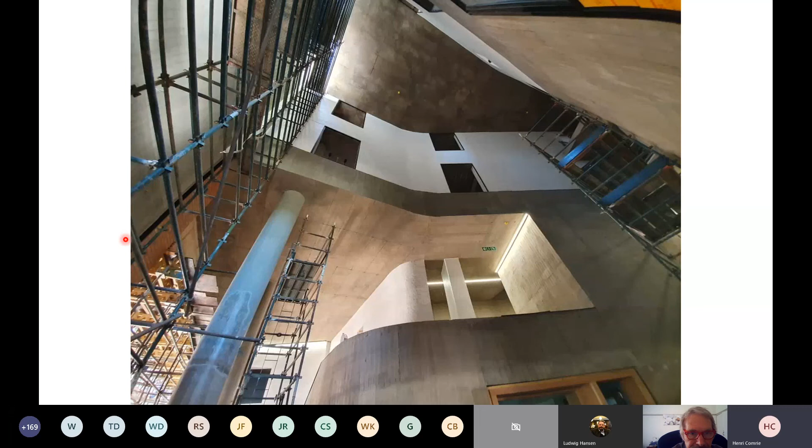This is the first glimpse you see, and then you cast your eye up a bit more into that space. One of the real pleasures of working in public building, you don't squeeze square meters into every space, and you work with assignable space, meaning that these spaces are really all usable on the ground floor. But in the context of the campus, it's really a very small area. If you look at that space on the total footprint, it's that area there.

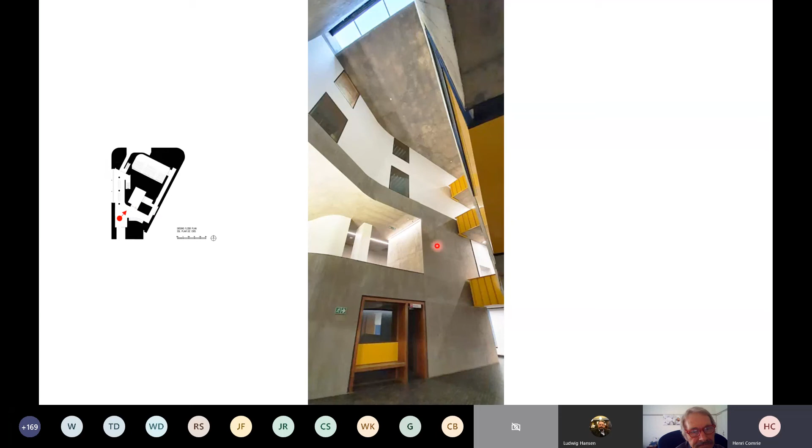But we worked within that volume, carved it out, and used the Raumplan and the promenade architecture. I can imagine students being in all these spaces, on these balconies, looking back down on the promenade space leading into the auditorium, looking back into the space, and so on.

The white of the building is conscious, because these are contained spaces. The outside is the brick, as you can see, but once you move into the building, we work with white, and sure, it's going to need to be maintained, but really that coat of paint, it's worth it. If one had to saturate it with dark colors and all sorts of, it wouldn't have been the same thing. And you can see the secondary light coming in.

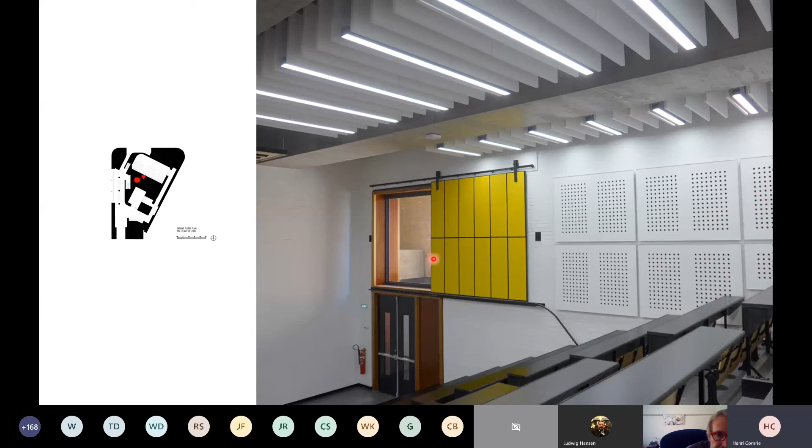This is a sliding hatch into the main auditorium, which Comrie detailed. You can see how light comes in from the outside. There's a puncture in the outer skin, and if you want to darken it, you just slide that thing across. It's just one of the gimmicks in the building.

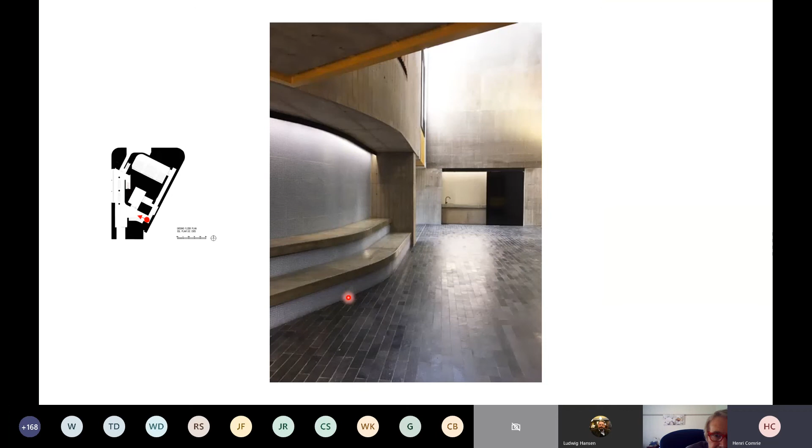In that shade space again, I put a little arrow on the plan on the left every time. It's not that easy to follow. Again, as I said, one has to actually visit the building.

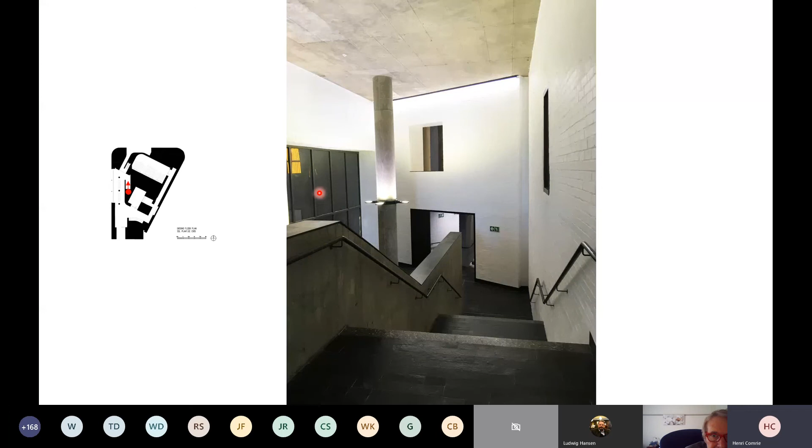Then going up towards the auditorium and looking back. At the moment, this photograph was taken when the building was still sealed off from the dust created by Mpeti's building on the other side there, so only recently have they taken that off. The experience will be totally different once that temporary shield is off it. And the seats, these are all communal spaces, usable spaces really in the context of a campus.

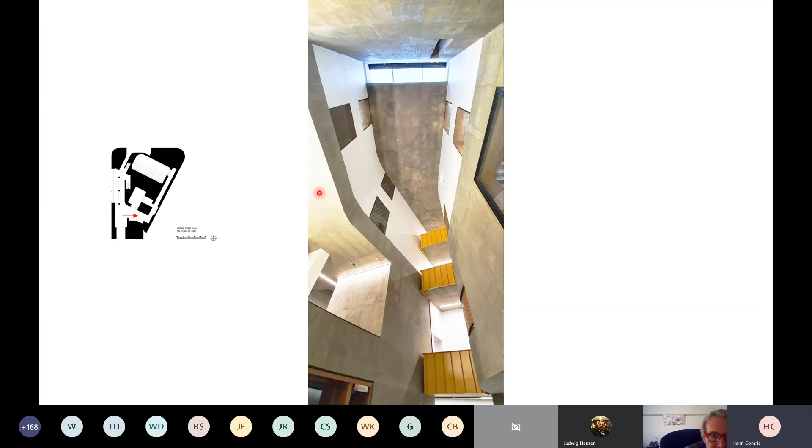And then if one looks back up, this is what you see in the space. Looking up, you can see again our preoccupation with light and controlled light in the manner of Louis Kahn, where you don't bring in the light in too obvious a way. You bring it in a subtle way that creates shifts in experience as the light moves across the skylight, and the mood inside the building changes.

You can see on the top left of the picture that same roof light. This is the space moving up towards the lobby of the auditorium space. This is actually the auditorium's lobby on the top floor, with just a bit of a hole to peep through back into the big space.

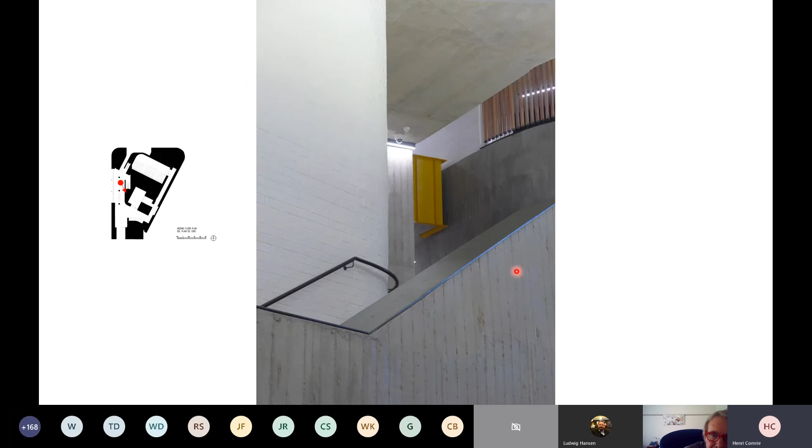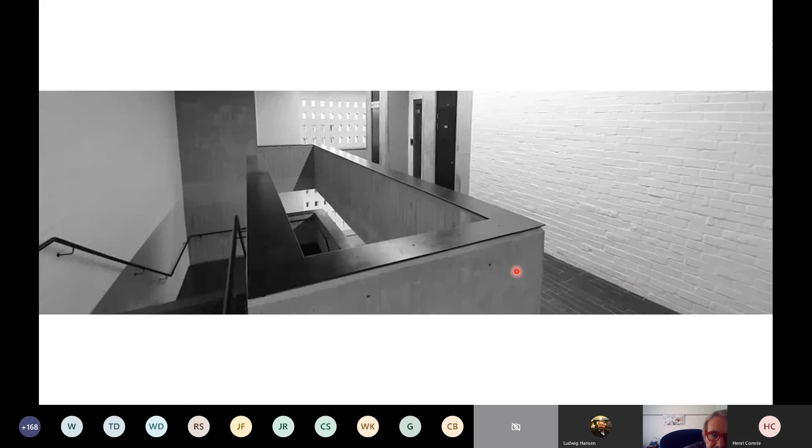And the shifting experience because of the way the plan was made, so that view really is on the model there. Going up the stairs to the auditorium, the more functional spaces.

And then imperfection. I spoke about how we like the idea of imperfection. This is what we saw. Amalie and I visited La Tourette, we had a laugh at this, and then Amalie did a site visit and found that. So just sort of a coincidence. But then the contractor, Jean, who was a fantastic foreman, said, can you fix it? And Amalie said, no, please just leave it like that. So imperfection is something I think one should embrace, but we shouldn't be too fussy. If the spaces work, everything doesn't have to be polished.

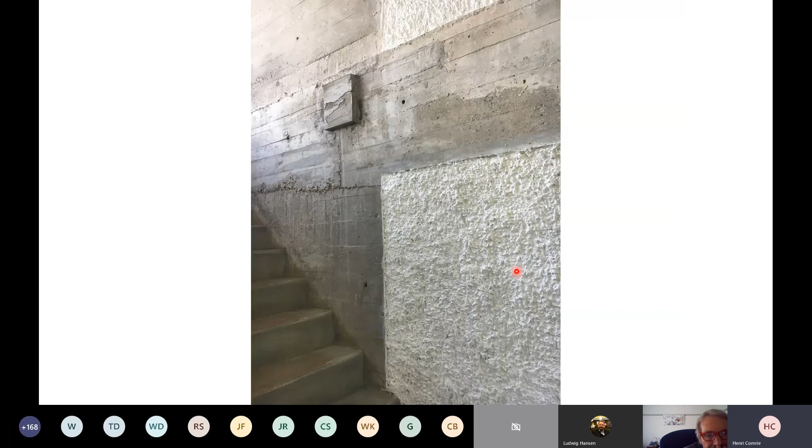Okay, so Ludwig, thanks a lot. I think that's it in terms of the formal presentations. I'll just exit this.

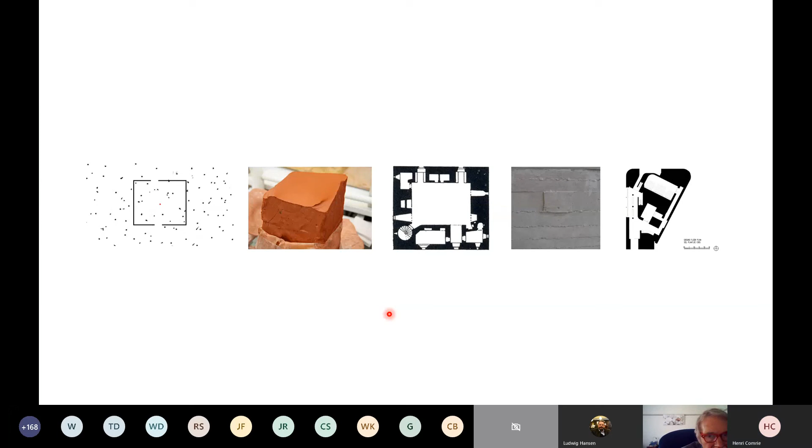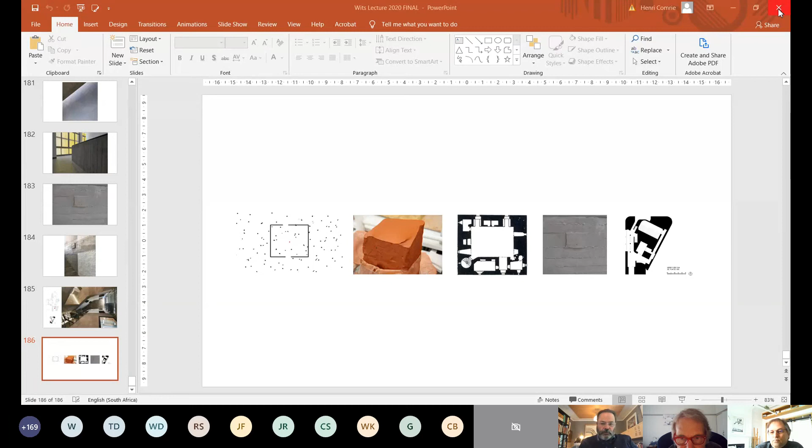So Henri, we always have some queries and questions maybe for exploration. I think there's someone who has a raised hand, it's Andronica. If you want to maybe ask your query, followed by Lionel.

Thank you, Henri, for the great presentation. What I'd like to ask is, I saw that you also touched a bit on coding. I'm currently dealing with coding in my Masters of Urban Design, so I'd like you to explain further in terms of urban architecture and code, for example the landscaping part and the roadscapes within the environment, because I noticed you said for good urban design we have to have good streets and then buildings follow. So in terms of coding, how would you code urban architecture? I don't know if my question is clear enough. Thank you.

Yeah, I can try to answer that. Firstly, I think code is something actually embedded in cities as it is. So a code is simply something we've extracted as urban designers, and we describe those things because what we've realized is that urban design is essentially a conservative pursuit -- not in the political sense, but conservative in terms of respecting the past and the way people have built cities in the past. So the code is really describing things so that they work.